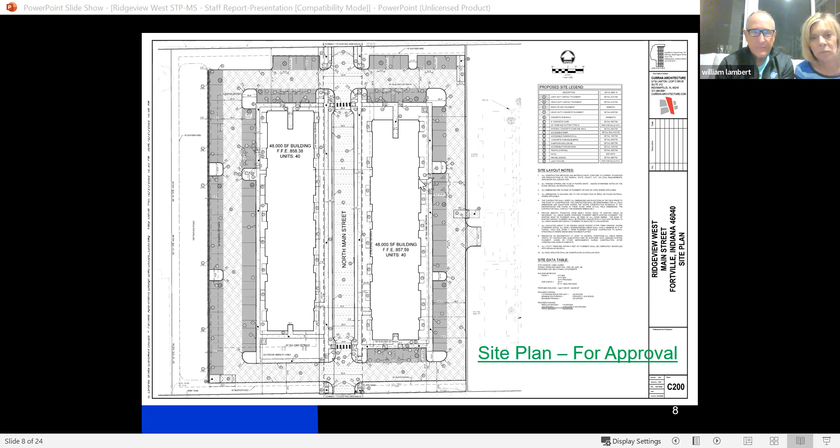Okay, so if you look at how the landscape plan and the parking is set out, and you look at where 706 North Main is - by the way, I can't see any drawings that you have up on your monitors, although I've looked at some things. But you can see that there are 6 parking spaces facing our front yard, actually all the way along the front of our property to the side of the house. But those 6 spaces will be 10 feet from our property line.

And there's also a drainage utility easement that I believe is 15 feet on our property and 15 feet on the adjacent property. I don't know what becomes of that, but there's a swale that goes down there that probably drops about 2 to 3 feet. I wonder if you're going to put parking there, is there also going to be a retaining wall to hold those parking spaces up?

How that grading is going to be done, it seems like I wonder if there couldn't be at least 6 feet tall of screening for when those headlights come in at night - there's 6 spaces with headlights facing directly at our house. Could there be some fence or 6 feet of landscaping or something? I can't really read what exactly this landscaping is, but it looks like pretty low-lying landscaping to me. And from where a car is going to be parked to our front yard is going to be 10 feet. It just doesn't seem like enough.

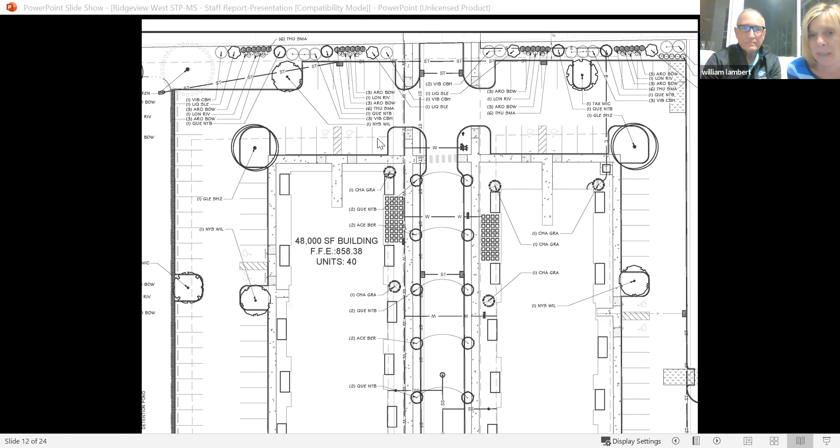Okay, yeah, and I mean we're just saying a minimum of 6 feet, something that would grow then obviously taller, and something like a pine tree or something that would screen all year long, not something that just has leaves in the summer and then it's bare in the winter. So I'm also asking for some kind of landscaping like that. Okay, all right, all right, thank you.

Is there anyone else on Zoom, while we're concentrated on the screen at the moment, that would like to say something? Okay, I know we had someone here in the room. If you'll come forward and just say your name, spell your name, and your address, please.

John Smith, 802 North Main Street.

My question is, the concerns that were expressed when this was all approved by the town council was traffic. And with Main Street going through, I don't see anything on here, and maybe that's not part of this, but what are we planning as far as stop signs in this area to slow traffic down coming through town?

Has that been addressed yet, or is that something that's going to be down the road? I'm going to take questions and then we'll get some answers here. Thank you so much. Is there anyone else that has any concerns or comments?

I just have one other comment with those 6 parking spaces. It seems like you could pull them back a little bit further from our property and do parallel spaces further down the property, get all 6 of your spaces without the headlights facing our house. That might be easier for everybody, and the elevation difference would be a lot easier to deal with too.

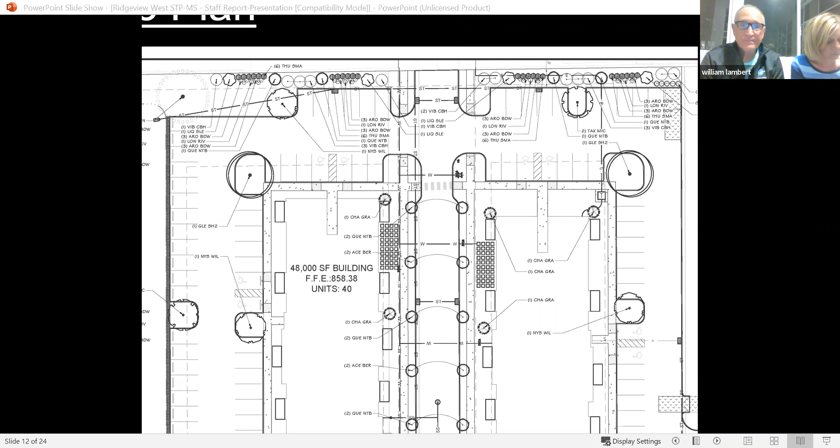Okay, all right, thank you. Let's see here, lost my place.

So if we have no more public comments, we have time for government officials that are here tonight that might have any comments. I'll get that in here a second. Okay, I'm going to show record shows the government officials have none. Okay.

Yeah, let's go ahead and do our board here if we have any questions or comments to Adam or the petitioner, and then we'll bring the petitioner back up and have him cover all these that he's heard.

All right, Jason. So Adam, we're talking about combining these properties into one subdivision, correct? The new Ridgeview and the old Ridgeview. One platted subdivision, correct? Yeah. So I know that the old Ridgeview is in a different zoning than this one, but what requirements of a subdivision are going to bridge between both properties that are now going to be in the same plat?

Well, the requirements to form a subdivision are pretty basic. It would just have each lot meet the minimum square footage in the zoning district, which these exceed what's in multifamily zoning. Basically, if there's anything in the planned unit development document that doesn't speak to a certain standard in a specific way, then you just default to multifamily zoning in this case. So each lot meets that minimum standard. And again, the size of the existing lot should not be an issue because there's already an apartment complex there, obviously.

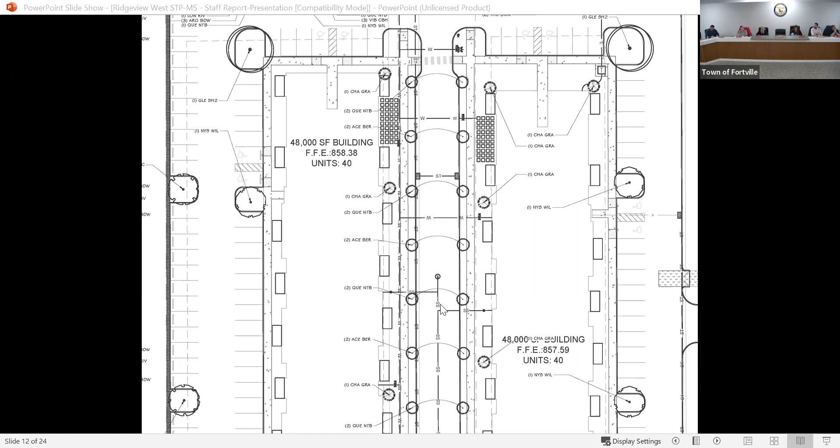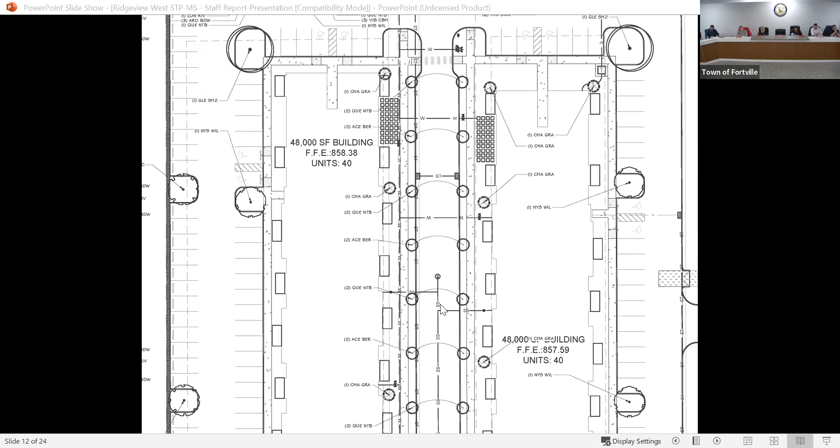My question is, there's 130 parking spaces and there's planned commercial on the entire first floor. So then there's 40 units, so 20 units for each floor, correct? Well, in terms of the commercial, the developer has the option of doing commercial on the first floor. There's no requirement that they do that, and they don't plan on doing it. So then residential will be on the first floor, correct.

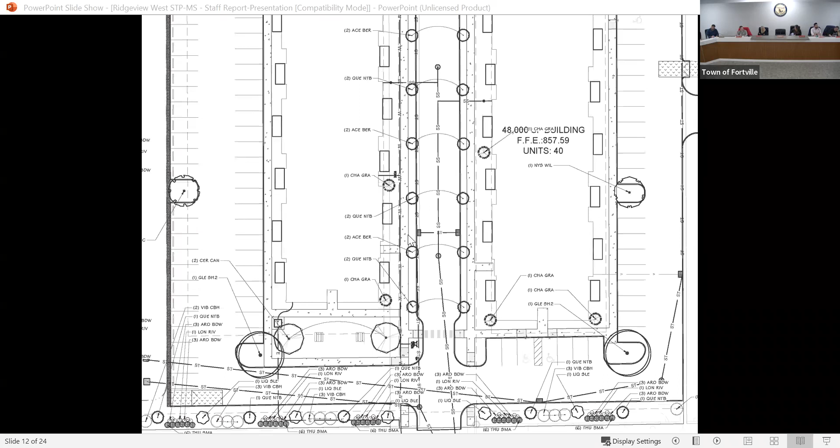But we said that the first floor is all going to be storefront. So how does that work with there being residential in it, if it's all storefront in terms of the appearance? So if we go back to zoom out of here. Okay, I think that's what I turned. So we're going to have a commercial look with no commercial presence? More or less, yes.

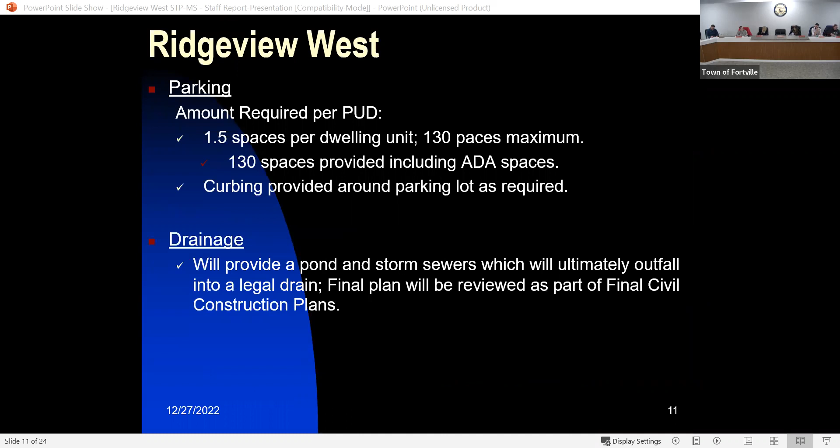Can somebody explain the logic, the rationale behind that? I think I defer to the developer for that one. Okay, we'll put that on the list for when we bring him back up. Because I can say, I'm not sure how comfortable I am with giving the appearance of additional commercial space for people to see when they're walking around town and there actually not be any commercial. It just seems to be a safety hazard to me.

I'm not saying that crime will be an issue, but you do have people who are looking to commit crimes, and they are looking for storefronts and such to vandalize. And if that's not a storefront, that's a residential area. I think you're asking for problems.

Also, if it is available for commercial purposes, my question would be, where will parking be? If the developer decides to lease to a restaurant or something like that, we have major parking issues in this whole area of town with restaurants. Just things to think about.

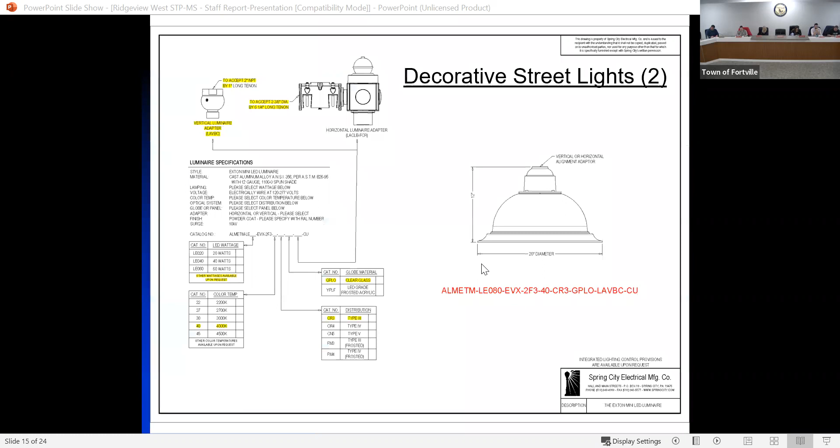I wanted to know where the pond would be located. And then this is just a personal preference. I see a lot of the development in the area, and most of Fortville is more of a classic traditional architectural style, and this seems a little bit more modern. It doesn't seem to really fit with the area. Just a thought. The black and white just doesn't really seem to flow.

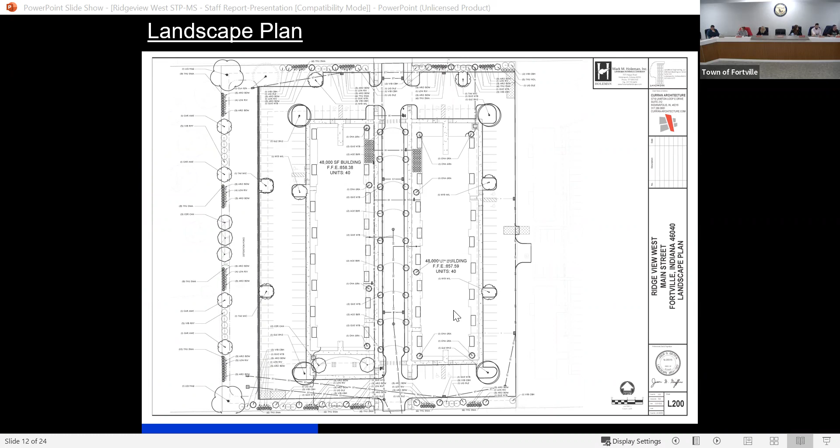In terms of the architecture or appearance of the commercial storefronts, if we take a look at what's in the approved PUD, it's this section here. It says all first floor amenity spaces facing Main Street shall have the appearance of commercial storefronts. So if I remember correctly, the idea was if they had a gym or a rec center, only that piece was required to have the appearance of a commercial storefront, not necessarily the entire stretch of the building.

And then to answer the last point raised about commercial in general and parking: when the PUD was developed, early on there were discussions about creating the ability to have more of a mixed use environment with some commercial. But frankly, while that is still in the PUD, the developer has gone through a parallel process in terms of the TIF financing for the project, and there is no commercial whatsoever planned as part of this project. So I think the only way that could happen at this point is if either the developer radically changed the plan, which is not likely, or if the project were to be sold or developed by another developer under this PUD, which is obviously a low likelihood. It does happen from time to time, and usually when there's a new developer, they probably want to make changes to some of the regulations anyway to fit changes they may want to make to the project. So in terms of commercial, it's not on the table at this point.

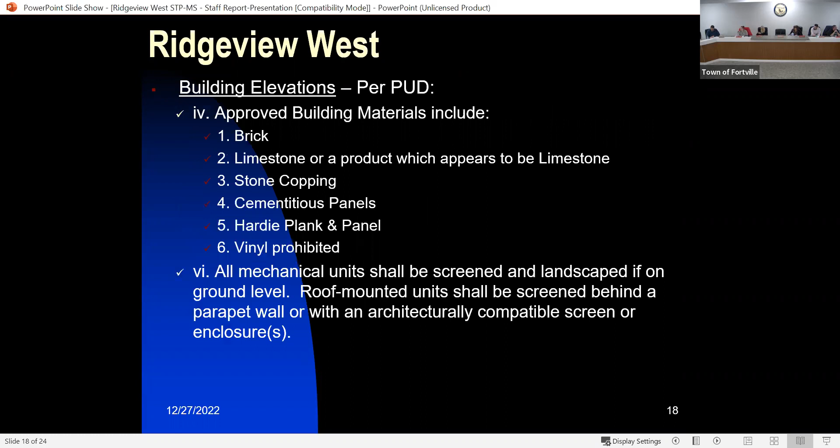To circle back around on the facade of the buildings. What I'm understanding is if they are putting amenities down there, like a gym or whatever, those specific areas need to have a storefront appearance. If not, it will still have a residential apartment appearance if it's actually an apartment unit.

Right, okay. And I just wanted to add for consideration too, is that as you can see, because this project is a recent project and there hasn't been a lag in time or a change in ownership, as is common, what they were showing in the PUD for their concept plan is almost identical to what they're showing now, virtually identical. So if they had never provided any sort of concept plans and there was a requirement to have a true amenity space, or to have an amenity space that had commercial architecture to it, I think

one could realistically argue that point, especially if they didn't have a concept. But I think the fact that they're showing these building elevations that were approved as part of the PUD package, and they're not veering from that, it would be consistent.

And I think lastly, I think the reason that language was put in initially was to not necessarily have a true storefront as we might think of it in a small town, but rather to not have a suburban apartment complex with a long strip of, whether it's vinyl or even fiber cement siding, to a way of breaking up the massing of the building. So I think the way the architects have designed it, there are different masses in the middle of the building, different elements of the facade.

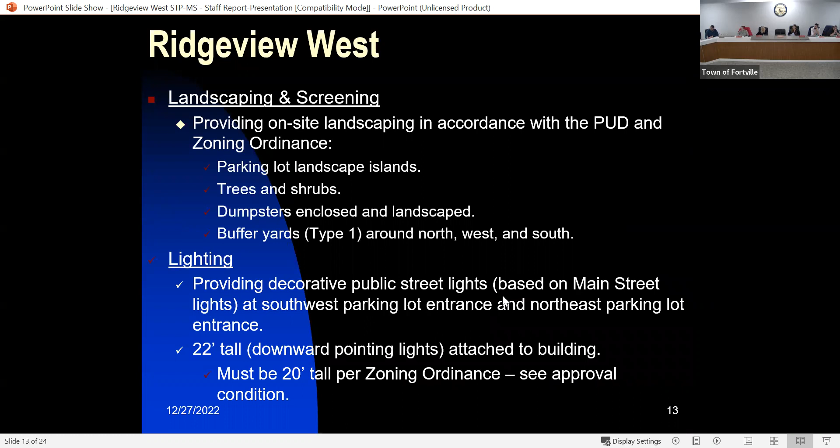So the parking spaces on the northwest corner will be more or less at grade to what we have right now. There's not a significant difference between the grade at the property line and the grade at the edge of those parking spaces. And those are evergreen trees that will be at least 6 foot tall, and then there's shrubbery, so those will block the headlights from going into their property.

How will shrubbery block the headlights? Obviously we have two neighbors that are concerned about this screening - well actually one about the screening, one will get to the traffic here in a minute. Adam, right now we have, I think, a type 1 buffer. What if we considered doing a type 2 buffer - would that increase the amount of arborvitae or whatever they're called, like the very dense ones?

Would that help buffer that a little bit more? Well, in terms of the difference between the two buffer yards, there's 3 different types of buffers and they get more and more complex, based on the adjacent land uses and how dissimilar they are.

For a type 1, from what I recall, it was just a 10-foot, and you had to have a certain number of trees and a certain number of shrubs. And then for a type 2, I want to say it maybe goes up to 15 or 20, maybe a little bit higher of a shrub and tree count - I'm sorry, I don't have it in front of me. And then for a type 3, you've got to put in a mound and/or a fence as well.

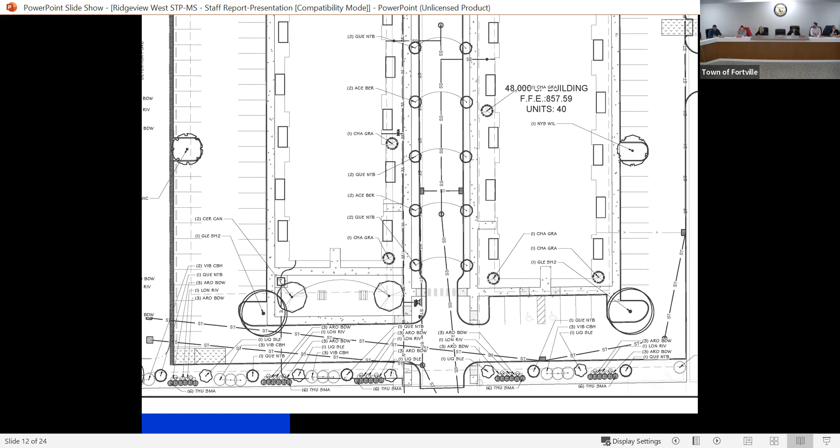Adam, I do hear that it sounds like it might need to be beefed up a bit. And also, especially as these plants are maturing and growing, it's going to take a little bit of time to fill in and heighten.

Well, I understand the neighbors' concerns. I would say that we could do, again, if the developer is amenable to it, is a dense planting of evergreen trees on that north area to form a screen, whether that's arborvitae or Norway spruce. I think over time, you wouldn't have to worry about maintenance from a fence, which can be a pain. But the point of having some dense evergreens in that area to form a continuous row, I think is a good idea.

And that's something you can work with the developer to enhance the density of the screening. Yeah, I think it would probably be best if you put it as a condition. The basic intent would be to form an evergreen screen along the north end, for the area where the parking faces.

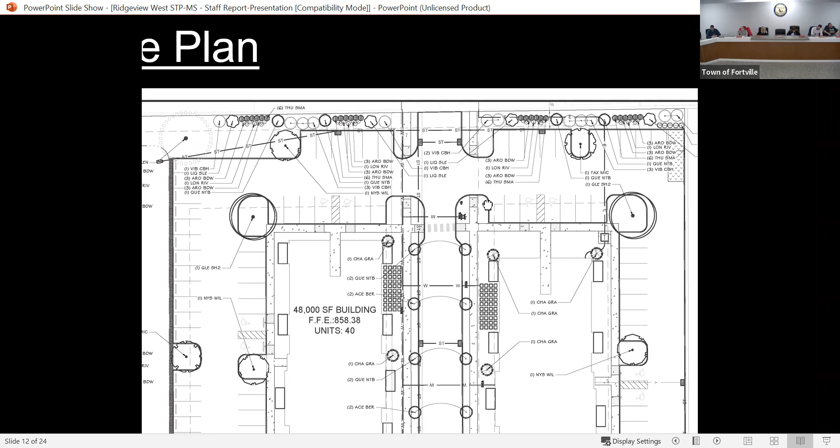All right, let me go back to my notes here. I do have one question: where were the dumpsters located? I'm just curious, I know they have to be enclosed and screened and all that. Yeah, so the first one's on the northwest corner there. Yep, that's right. And then the other one is on the southwest corner of the site.

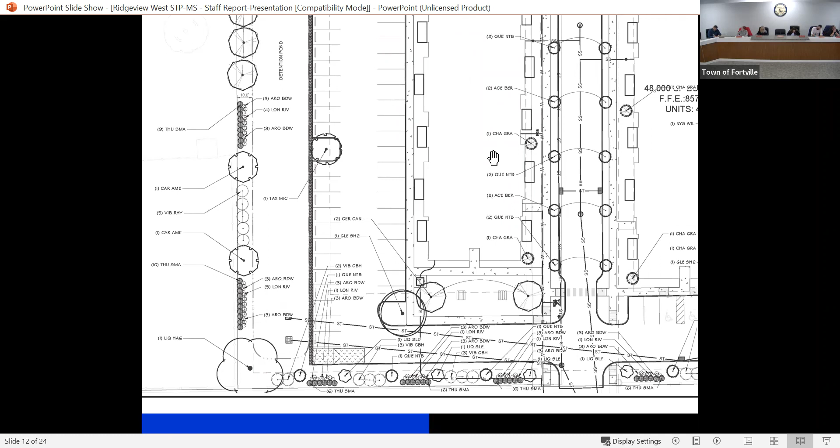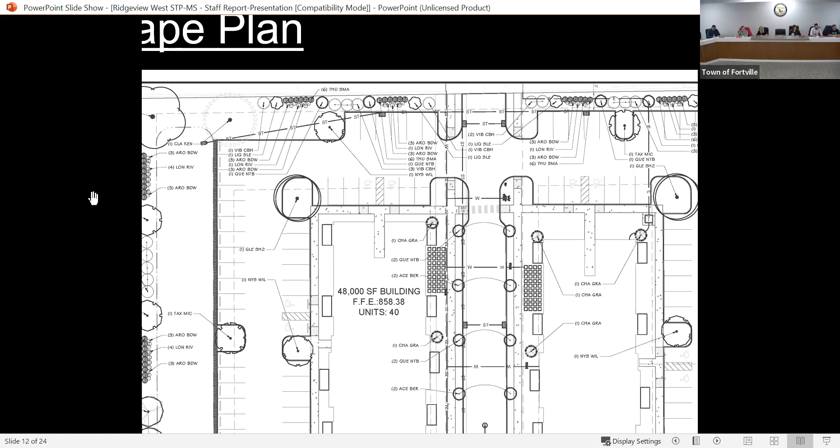That's the traffic issue that was brought up by the neighbor as far as stop signs and all that. Will that come at a later date for review, or is that something that's automatic within the PUD? Well, we would review it as part of the final plans, but my understanding, in full transparency, is that there are no plans to have any four-way stops or anything like that on this stretch.

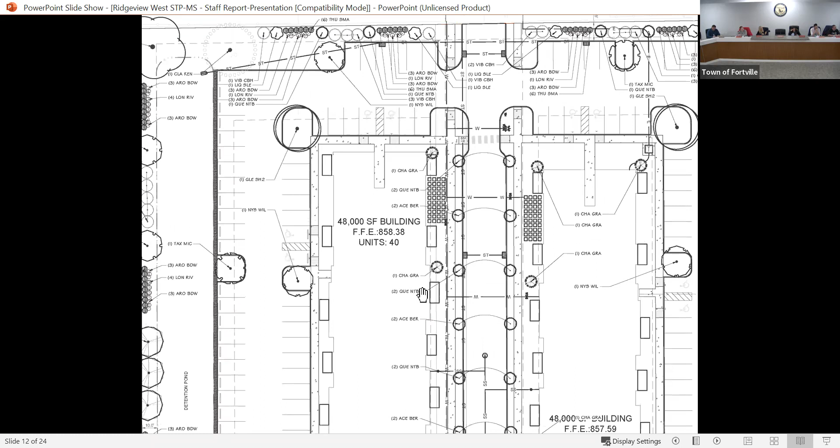I think the only stop signs you would see, if at all, would be coming out of the parking lots onto Main. So then Main Street, being connected from the neighborhood to the north, is that going to be one thoroughfare with no stops on it? Correct, is that correct? That's correct, until they get to Carolina or Michigan, going southward.

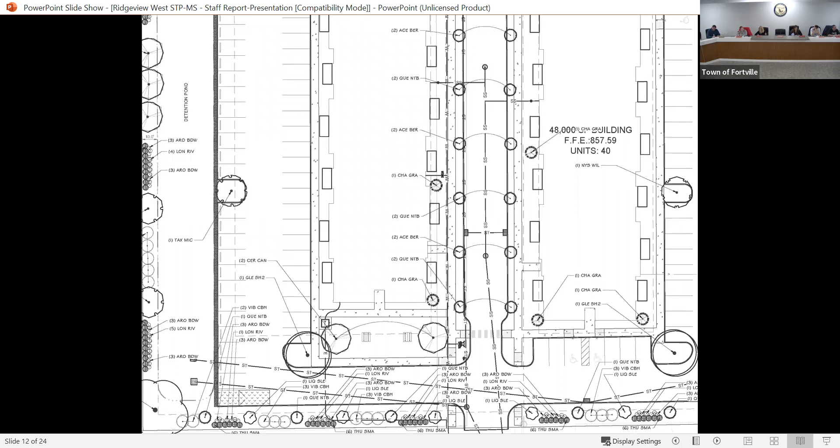Is that something that is an internal thing, Adam, or does that come back around to us? And is that addressed like in a traffic study? It's something that is at the discretion of the town, and it's based on, I would say, best practices in terms of traffic flow and design. I don't believe that a four-way stop would be warranted at either of these places based on the amount of traffic that's coming.

So it's not even a decision that this board makes. If the neighbor still has questions and issues, I would refer him to call your office to discuss. Yes, and then ultimately, I can't remember, because we haven't had this come up in a while in terms of new traffic control devices—there may be some town council involvement. Definitely the town manager, and possibly town council. Okay, does that answer where to go to next?

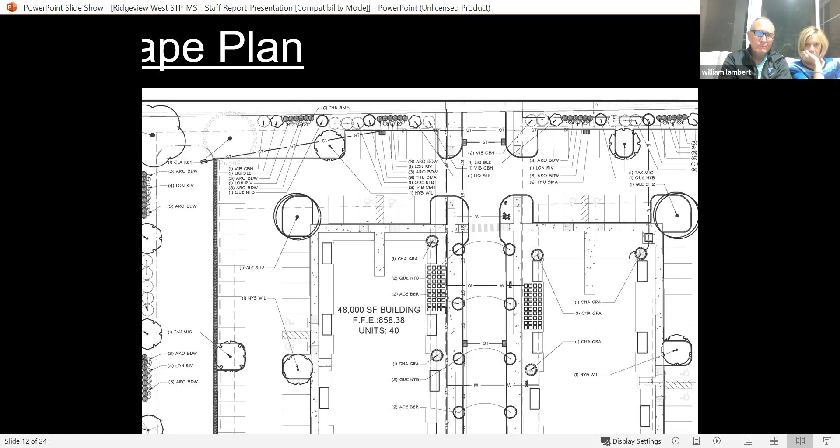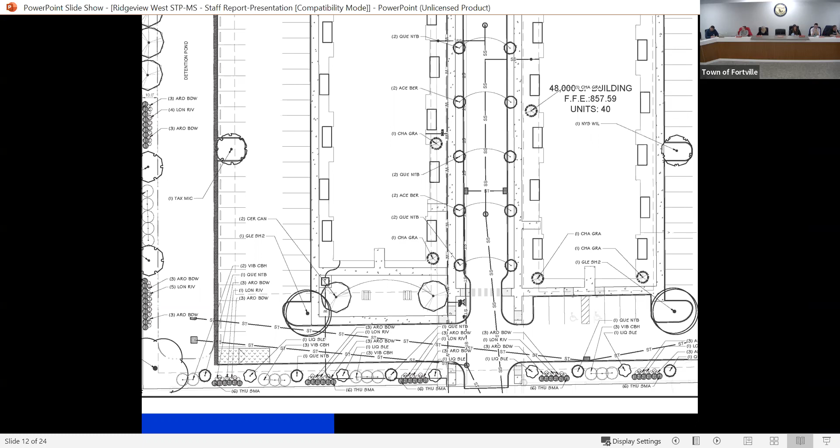Yes, and then it wasn't brought up. Sorry, Amanda. It's okay. As I pointed out, most of the residents that surround this area are more of a classical traditional nature. Was any thought given to that when you guys were designing the look of this building? Because I feel like the black and the white are, I mean, it's flashy. It's gonna stand out, it's gonna be very look at me.

Because we have a lot of single story, very small 2-story houses all in this area that are very conservative. And I understand growth, I understand progress. I mean, my job is always changing, constantly changing. But I'm just wondering, is there anything that can be a little bit more empathetic to the community?

So we went through considerable amount of iterations, I guess I would say, with staff and through council and through when we went through the rezoning and all of that earlier this year, and talked through that quite a bit. On the ends of each building, we actually made them 2 stories instead of 3 stories with a pitched roof.

To more fit in with the single family homes that are on either side of that. And then in the middle, rather than do a pitched roof and make this a much taller building, we went with a flat roof in the middle. And then, just trying to break up that facade, but also give a nod on the ends of the building to the residential. So there was a lot of thought that went into this.

That was several months ago, and we went through lots of iterations, again, through this commission and through council and with staff to get to where we are. I see that in the thing.

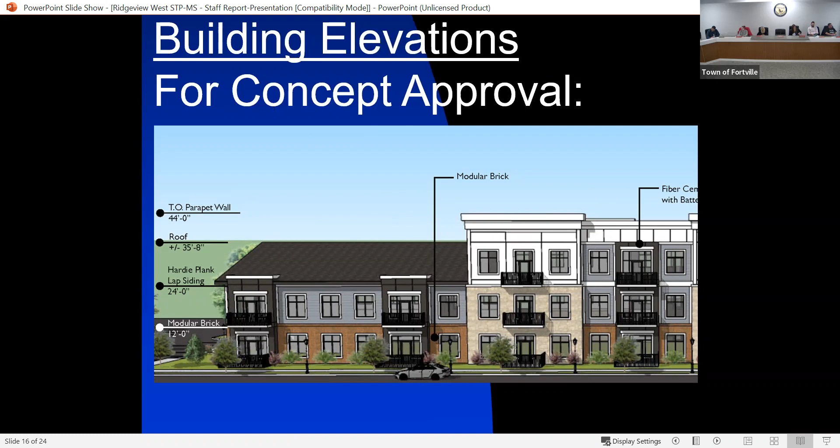Have other 3-story apartment buildings that are just a little bit, blend in a little bit as well. And it's a great design. I think that the fact that it does blend in with the 2 stories on either side and the flat top roof, I think you guys did a great job with that. I like the coloring on either end, but just the bright white with the black all around, I think it is a lot.

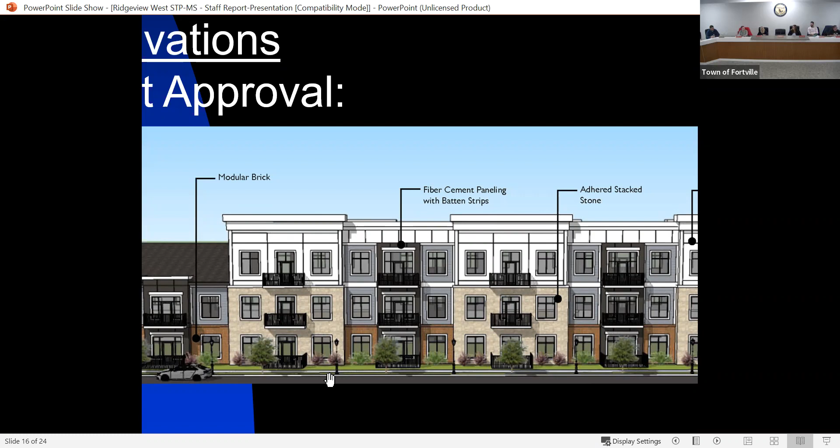So I've got a follow-up on that. So the textures and the materials that will be on this, are they going to look very similar to this elevation? Do you have paint colors and all that already determined? Or, we're at about 50% CD, so I don't know that we've necessarily. Okay, so it may not be all black and white. You're gonna have stone color, you'll have brick color, you'll have paint color.

Melissa Garrison, with Current Architecture, is on Zoom. She's our architect, so she may be better able to answer the questions than I am.

Yeah, I understand. I told you, the ends of the building seem very sympathetic, you'll see a lot of blues, a lot of cream. In the neighborhood around there's a lot of brick. I understand you can't do a solid brick building, that would be an enormous expense, brick facade in today's time. But just sticking with more neutral colors just seems to be more sympathetic to the neighborhood and the surrounding area. You have churches, you have parks, you have historic buildings.

All right, well, I'm going to end on one note here, and I don't think we've talked about this, and that's the lighting. Do you all have a problem with taking it from the proposed, I think it was 22, down to 20? Okay, fine, because that would need to be a condition. That's when we get to that, absolutely fine.

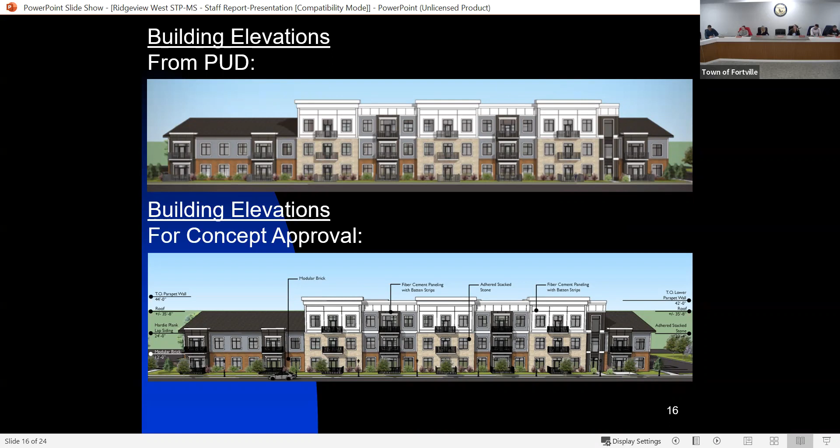All right, it looks like, Adam, should we do this in two chunks? One for the 4-lot minor plat subdivision, and then a motion for the site plan, landscape plan, and building elevation. I'll do one motion for each case, meaning case number 06 STP 2022. All right, so I am going to be looking for a motion from a board member to either approve with conditions, or deny the site plan, landscape plan, building elevations, and lighting.

West site plan, that the outdoor lighting, and that the entire northern property line have additional vegetation, evergreen. I'll second that. All those in favor? Aye. Any opposed? Any abstain? All right, that looks like that one passed.

Let's go then to the second one, which is the 4-lot minor subdivision. So I'm looking for a motion to approve with conditions, which I don't think we had discussed any, or deny the minor subdivision. I'll make a motion to approve case number 06 STP 2022, Ridgeview West minor subdivision. Do I have a second? Second. All in favor? Aye. Any opposed? Any abstain? Motion passes.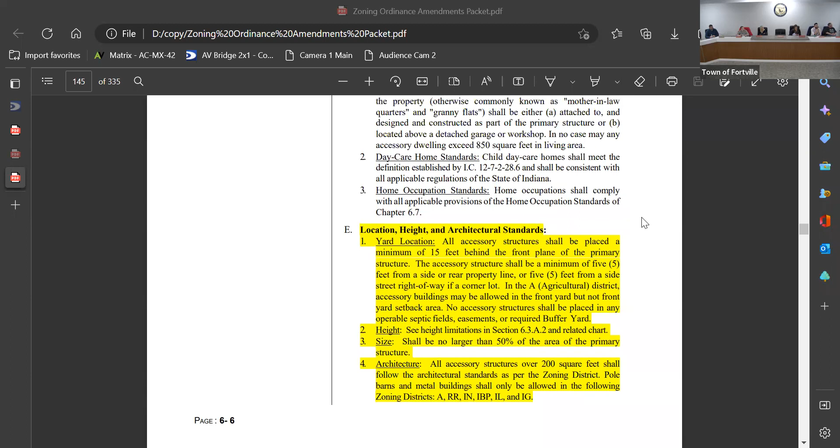I know that might run counter to what people think, but it's good to know that we did delete a whole section that was not used, not necessary, and an unnecessary regulation. So with that, if you have any specific questions on any particular text you may have noticed, I'd be more than happy to address that. Okay, thank you. All right, thank you.

All right, well, we're going to open up to public response, which doesn't look like we have any public left, so this will go pretty quick. Next is government official, have anything to say on this? The shaking of the head is no. Does the board have any questions for Adam over any of these changes that they saw? Oh, I want to mention one other thing.

At the study committee, Cheyenne had mentioned a bunch of different plants, and she was very knowledgeable as to what was invasive species. Our list was out of date and did need updating. So that was really the third of the top three things we dealt with: getting rid of public art, dealing with accessory structures and pole barns, and updating the plant list for the town.

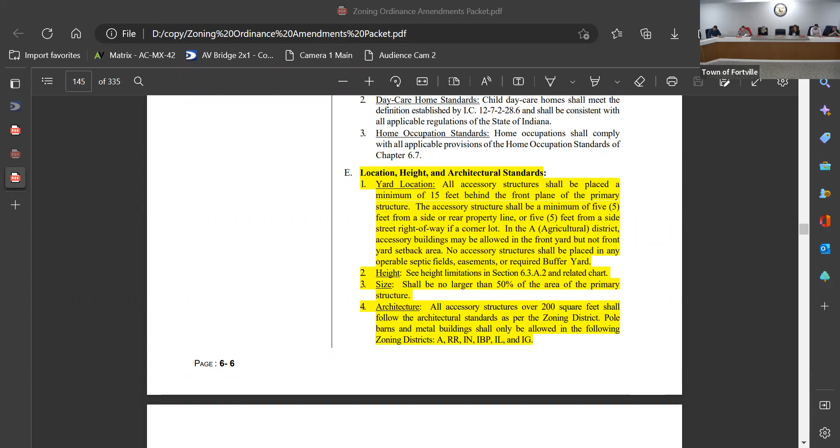Okay, well, I think we're down to looking for a board member willing to make a motion to approve or deny the zoning ordinance amendments. I'll make a recommendation to approve and adopt all amendments proposed to the Fortville zoning ordinance. Do I have a second? Second. All in favor? Aye. Any opposed? Any abstain? All right, looks like that passed.

Well, do we have any additional board comments? This does say December 19th of 2022. On our paperwork, Brittany brought up that it was introduced and filed on December 19th. Is that going to be an issue? That's true, actually. So the ordinance went to town council for a first reading.

It's the exact same way we process rezonings, where we'll take it to council for their initial input and hold first reading, then it comes to plan commission for your recommendation, and back to them for a final decision. Is there anything for the board or anybody to sign on this document, or do we just recommend approval? I think it's the town council.

There is a section in the ordinance itself, the way it's formatted, that has a spot for your signatures, and I think we'll have you do that if it passes, at the next meeting. I also wanted to mention very quickly.